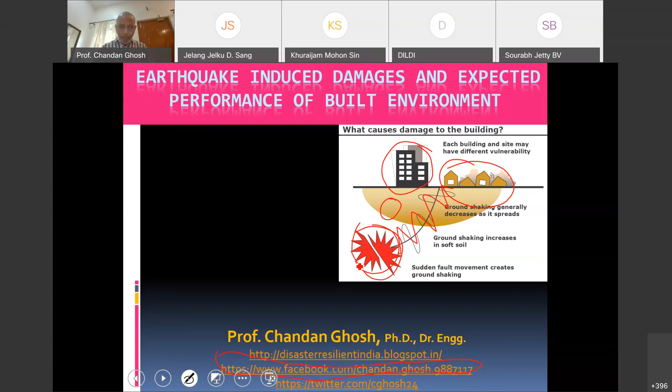The second thing is that whenever an earthquake happens, we record it. Across the globe there are over 70,000 seismometers. In India, counting everything, there are more than 500—IIT Roorkee alone has placed more than 400 seismometers in Uttarakhand, and IMD has more than 120.

Details you will get from Dr. O.P. Mishra. But for a civil engineer, when we have to live in a building—multi-story or single story—what comes into the civil engineering domain, especially the Department of Earthquake Engineering at IIT Roorkee, is significant. They are counted as famous, having a lot of experimental as well as theoretical knowledge.

For the common man: the kind of building you see here, a two-story building—if we recreate an earthquake and apply the same earthquake to a two-story, four-story, six-story, or eight-story building in a laboratory, how do they behave? A number of such experiments are being done in the country, not on a big prototype scale, but in other countries like Japan, Taiwan, and Turkey, they have tested prototype buildings of two, three, and four stories to check how earthquakes affect them.

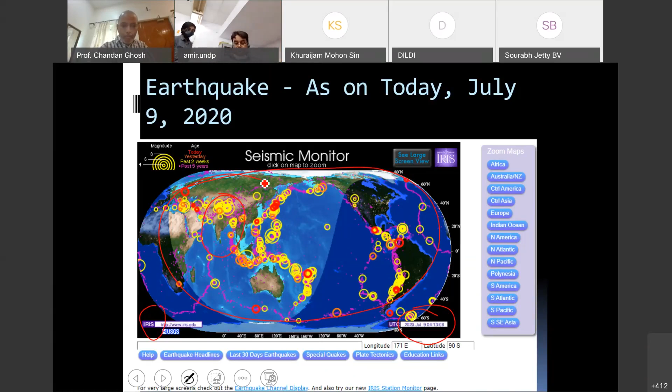And so many earthquakes with times are being recorded by USGS through IRIS, a seismic monitor across the globe, every time, every second for the last so many years, these earthquakes are plotted. Here you can see it glowing as a seismic monitor. So with a click, we can click over here in India, and we can see in and around India how earthquakes are recorded through this seismic network and how they are placed on our global map.

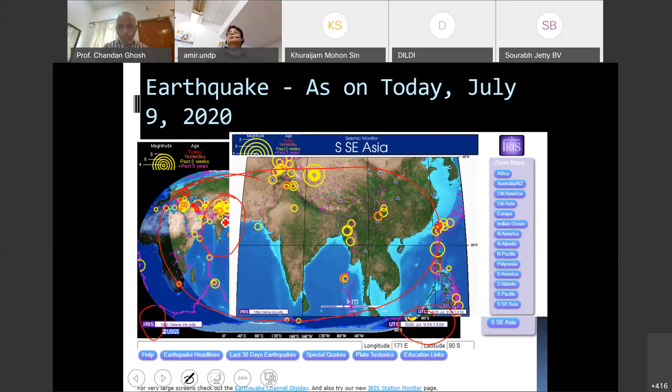This is quick information in the world of information, that these days things are available in our mobile phone. Now artificial intelligence, machine learning, a lot of things are coming up. So our scientists working across the globe made it possible to bring whatever earthquakes are happening across the globe, where I said that 70,000 plus seismic monitors, seismograms, are there. And their data, not all, but some of the important data maintained by USGS, are showing us all these things instantly on the map.

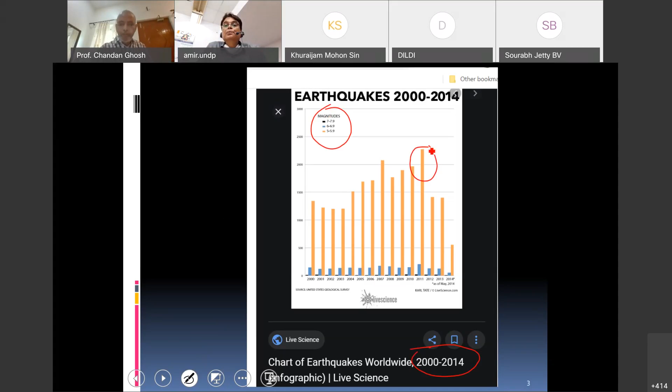Not only that, instrumentation started more than 120 years back, and those earthquakes are also being compiled. I wanted to highlight only this because time is short. In the last 14 years, you can see how many earthquakes are happening. Those more than five may be as high as 500, as high as 2,000 earthquakes in a year, which means on average 4 to 6 earthquakes of more than 5 are happening across the globe, which sometimes may create a lot of havoc and impact on buildings, which I am going to show in the following presentation.

Just giving you an iota of information: 8 and above earthquakes happen once a year. 7 to 8 earthquakes, if you can see here, at least 20 to 25. It means every year, 7 and above earthquakes, like the Nepal earthquake of 7.7, are happening across the globe, about 2 earthquakes in any part of the earth. And about 5 to 6 felt earthquakes, which may be damaging to some extent, are happening in our country. We have no way to control them. This is what I wanted to highlight.

So an earthquake happens, we cannot stop it, we have to bear with it, and it is our own responsibility to protect ourselves. So we have to take our own responsibility, including government, you, we, everyone, all experts sitting there, because earthquakes shake buildings and cause damages. If you are not careful enough in designing and constructing the building, which I am going to show you some of those lacunae, then it breaks, torn apart; roads, dam breaks also may happen. It causes landslides, tsunami, and a lot of things.

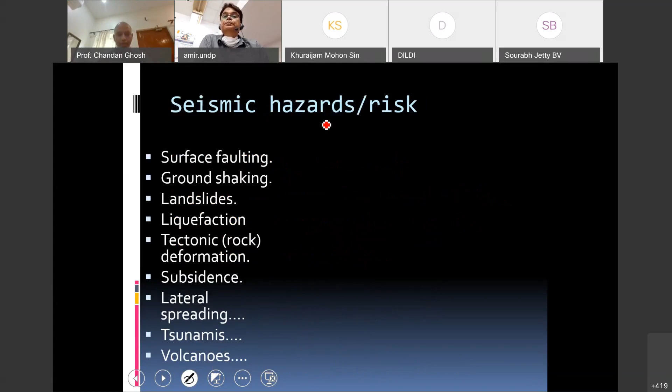But we cannot make buildings really, in engineering language, earthquake proof. We can make them earthquake resistant. That is our limitation. So let us see all these things that happen in an earthquake. Landslides, dam failure like Subansiri Dam may occur, but these rates are very small.

And while designing a dam, our experts take care of a lot of things in the design of the dam and reservoir and maintenance. But if an earthquake happens which may fail the design or concept that we have accrued so far, then we cannot help. But we take most of the available knowledge into consideration while making, constructing and maintaining a dam.

Building collapse, of course, I'll do in detail. I'm not going to show this part: train wreck, utility malfunction, tsunami. I'm not going to cover those here. Landslides also happen, which is complex. I'm not going to cover it. I only concentrate on this portion. There may be fire also.

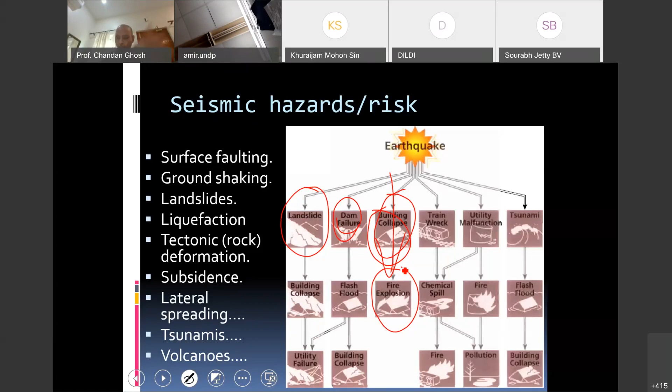So there are a lot of tests and experiments being conducted across the globe by various research laboratories to simulate building collapse by a recorded earthquake and then fire or utility malfunction. All these things have been tested, because being engineers, from a scientific background, whatever is happening we cannot create or control, but we can at least reproduce some kind of its impact in our robust laboratory, where I said 7-story, 8-story buildings are tested to check their performance, because my topic is performance. So the context is building performance in earthquakes, and where we are lacking, we will see.

Construction monitoring and peer review check: we are not even conscious about the new buildings even today. I'll show you many things, barring a few of them which are being monitored and constructed well. Damage pattern and mitigation: mentioning codes, National Building Code 2005 or 2016, NDMA or NIDM guidelines, in the sanctioning of the plan is not enough.

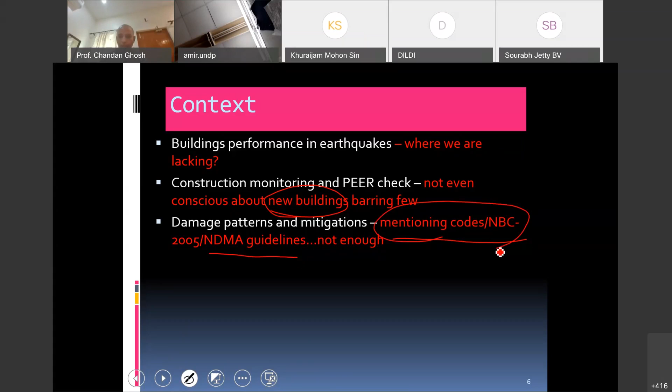Implementation, enforcement, community guidance, community awareness, which we have to work together on. That is more important than simply mentioning that Fe 550 or 600 rods are being applied or such and such cement is being applied. I'll show you those examples also.

Economic feasibility of mitigation measures, which is being hyped right now because of the several earthquakes happening in the last 3 months in and around Delhi NCR. So I should not say it is hyped, it is happening. Our instruments are recording, people are coming to know it is happening more frequently. But no systematic study has yet been taken up by our scientists. Simply we are being asked whether it is the precursor to a bigger one or not.

We are saying something not based on the systematic studies which must be in place, which have not yet started in our country, to check the activity of those faults in and around Delhi or elsewhere in the country. Some experts are taking it up; Dr. Devesh Walia is one such expert, taking care of the dormancy or activity of the faults in the northeast part.

So, health monitoring of buildings: here I will concentrate a little, and also show some glimpses of a building survey that we did in a quick manner. And post-earthquake health checkup: no steps have yet been taken so far. After an earthquake occurs, we have to check whether some progressive failures are there or not. Systematic study has not yet started in our country.

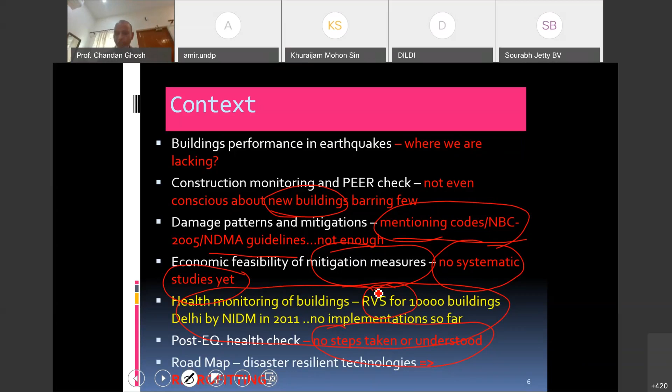Now, with the recent earthquake in Delhi, we are concentrating more on rapid visual screening to check whether my building is safe or not. We are in a very, very preliminary state. And of course, what will the roadmap of disaster resilient technologies be? Many guidelines, many meetings are being held, but I cannot discuss all these things.

So as Dr. Walia has mentioned about me and Facebook, I have taken some screenshots this morning, like CG means Chandan Ghosh, FB means Facebook, and the 1490th posting, where it is showing with a little bit of comment the hill towns of the country. Surely no expertise which we are discussing through this seminar is enough to apply or think of some retrofitting or any such measures.

It is not possible just by seeing these things; okay, people have been living there for 100 years, but individually looking at one building here, it may affect others in case of an earthquake and earthquake-induced landslide in such a steep hill. So looking at such constructions going on without guidance, without knowledge, without understanding, we also say that we do not know many of the things.

So we as engineers know nothing so far about protecting such built-up facilities, and it is completely impossible to save lives if an earthquake of 6 plus comes within 20, 30 or 50 kilometers, because this is seismic zone 5. So just remembering or telling that we are in seismic zone 5 is not enough. Here we have to work together to take care of each of the buildings.

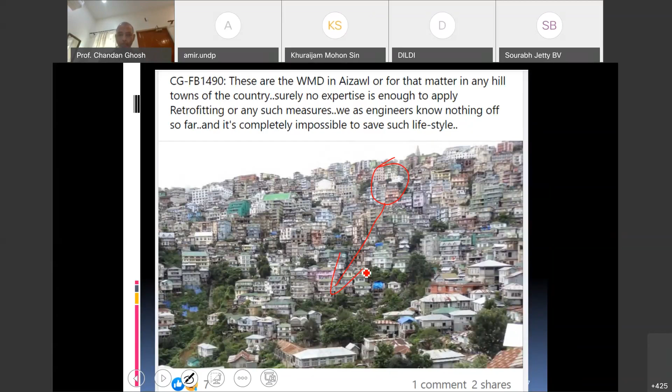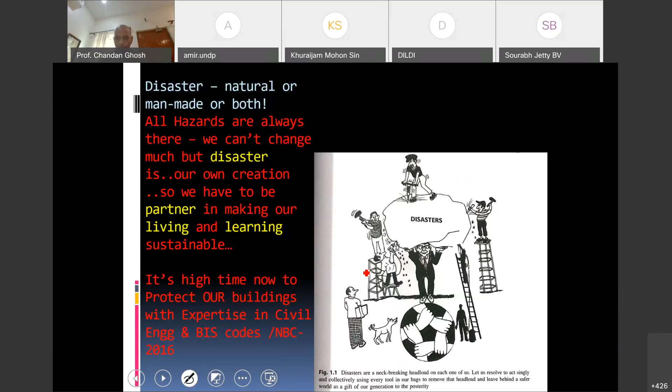So disaster, natural or man-made or both, there are a lot of definitions, but we have to be partners in making our living and learning sustainable. It is high time to protect our buildings with expertise in civil engineering and the relevant BIS code or NBC 2016, which has been revised; doing things simply our own way, from our own angle, is not going to help.

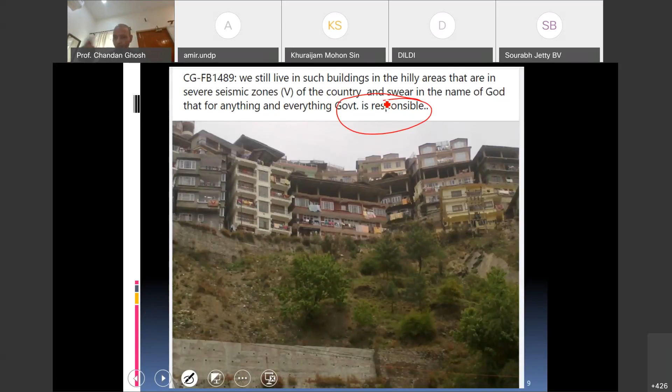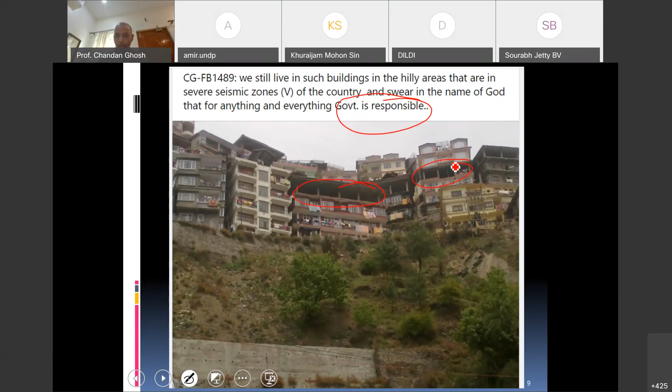This is also from Facebook: we still live like this in hilly areas in severe seismic zone 5 of the country, and swear in the name of God that the government is responsible for anything and everything. Probably we have to see who is responsible. Before that we have to make our own building good enough, not allowing such openings, because any little shaking of intensity 5 or 6 will collapse the building. And since this is a hilly area, especially in Shimla, they will fall on other buildings also.

While trying to address these issues, buildings on stilts, here it is on stilts, were tested on a shake table. I'm not able to show it here, last time also I tried, but there is a complete video where a 6-story frame building is being shaken at the ground using the same kind of earthquake that we have experienced, and within 5 to 6 seconds, the bottom part here, I have taken from the video of that experiment, just one screenshot to show you that the 6-story frame tested on a shake table fails at the bottom.

So this is what is going to happen. I'll show you some of the techniques for how we can stop our existing buildings, 5-story, 10-story, 20-story, like in the NCR area, on slender columns and stilts, which can be checked, or maybe some measures can be taken to stop such buildings failing in this manner, which was proved by an experiment that they will fail again. Because experiments, if you repeat them, it will happen regardless.

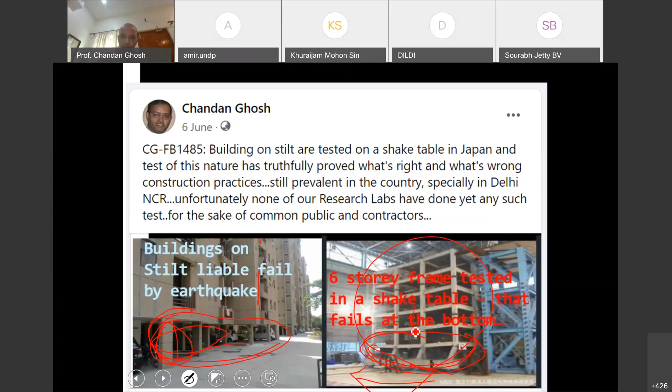So this lacuna inbuilt in such buildings has been retested, revalidated by doing a similar kind of study without any infill wall here, no infill wall, and even then it is broken, which means it is much more dangerous. But you see that this one, there is no column. Here there is no column. You can see at this point there is no column.

So such kind of geometrically dissimilar buildings are constructed in our city areas, even though so much reinforcement is being provided as per design, I don't know what kind of design permits this. These are the designs made by so-called engineers. I would say so-called engineers, maybe there is much other interlinking there, which I don't want to explore over here. I have mentioned here all these things.

Keeping all faith in the building code, we continue to make such constructions with genetic flaws by providing this irregular column placement of load-bearing columns and beams. And we still think our municipalities, as I mentioned here, shall come on the receiving end with PILs flooding the High Court and demanding justice for the earthquake safety of all buildings in Delhi or NCR or Northeast or NEHU or wherever it is.

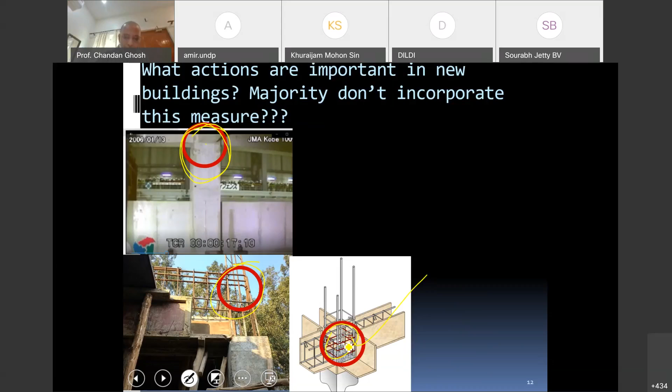So this is a recent thing which I wanted to highlight. And we still make such kind of things which is wrong, genetically wrong construction. And it is there in the code, to provide stirrups inside, but still we don't provide them. But this is provided over here, where the beam is centrally located. Then with such kind of stirrup, if it is provided, think of that, is there any extra cost required while ensuring that these things should be like this, not like this?

This is where the municipality or government is not going to come. This is where the community who are attending here, not as earthquake scientists or seismologists or civil engineers, have to look to ensure that the mistri or mason or contractor ensure that these things are in place. Otherwise, if we make these things, this is not going to be earthquake resistant. We must remember that we are living in seismic zone 4.

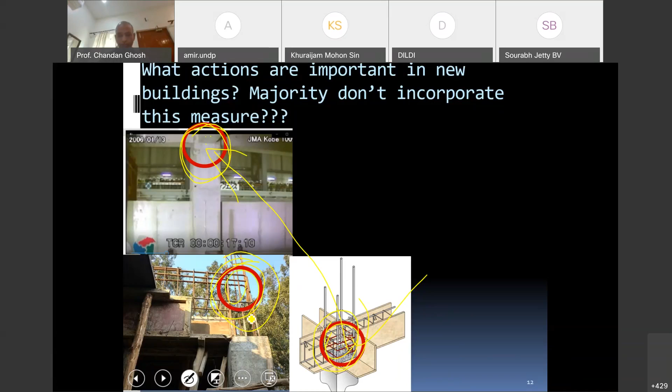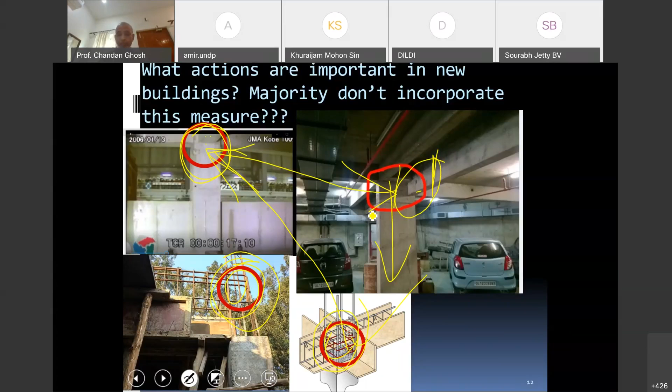Like you see, this is one of the, I would say, green rated buildings, where you see the position of the column, hefty column, but see the slender beam where it is not at the center. You see the mockery of design, the mockery of construction that we are doing in actual implementation. These are in the posh area. These are green rated buildings, maybe 5 star rated, but we are neglecting this cause where civil engineers are very much concerned. I'm showing you that these are all defective buildings. Whatever hefty column you are providing, if this column-beam junction is not enough, these buildings are defective.

But constructing, reconstructing, repairing them in minimum possible time, where, in case a landslide happens, our Border Roads Organization keeps a lot of contingency arrangements to bring the road back in a few hours or a few days. So getting this capability, wherever such kind of chances are there, is also contained in our fighting or living friendly with earthquakes or landslides.

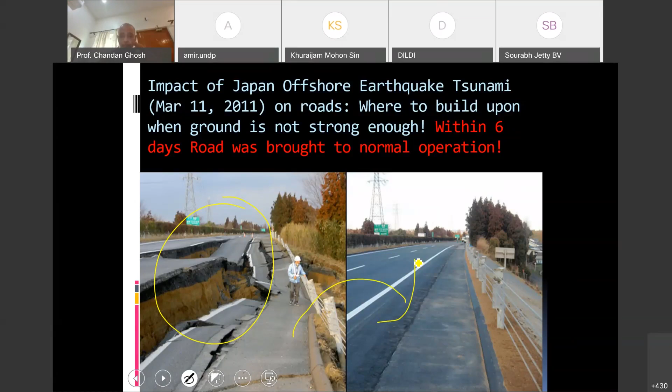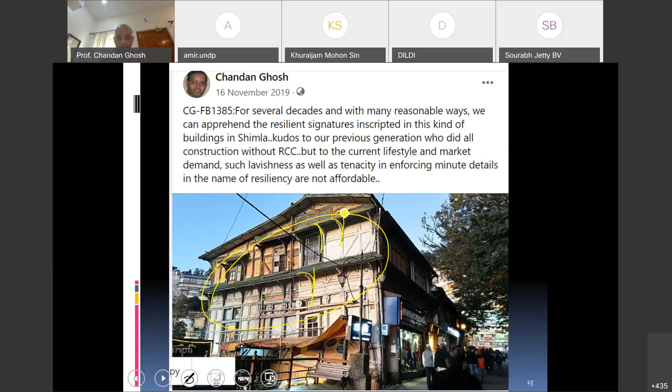Of course, they are not living here, but we have not taken any lesson from this, the kind of bracket that they are providing here. We have incorporated all into the RCC, with the kind of blemishes that we are doing. So the community has to come forward. This kind of building in Uri has failed, but these are still existing.

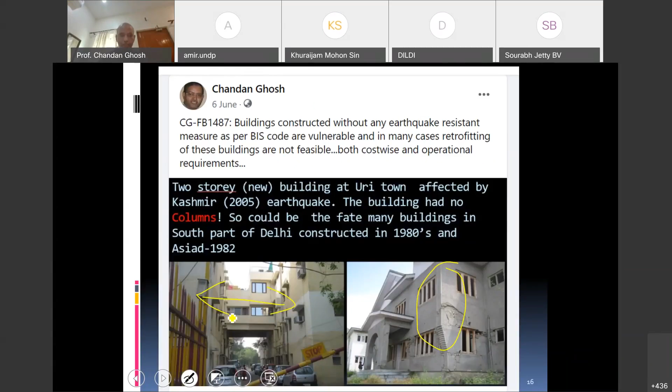So these are the things. I have given you the slides. You can see I still have things to go. Here a column is not provided. That is why it's broken. New building in the 2005 earthquake in Kashmir. In 2005, 70,000 plus people have been killed. But these are again the signature of Dhajji Dewari type of buildings in Kashmir and that side.

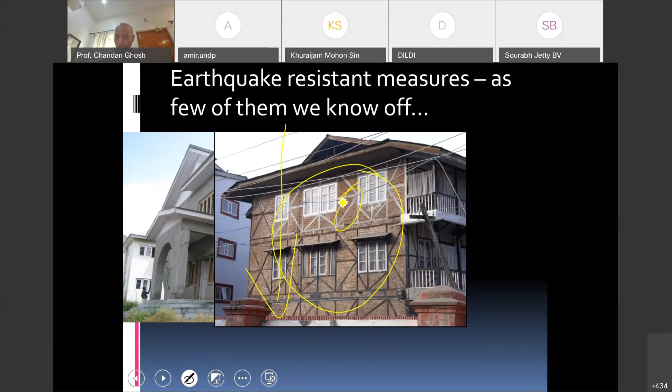And these days we do not make these things because proper methodology is not there. Karigar or mistri or expertise is not there. And instead of using wooden things, we have got many aluminum as well as metal frame members which can be used, but the art has been lost, except a few documents are available. So this is again in the Northeast, in Guwahati, where these are still existing.

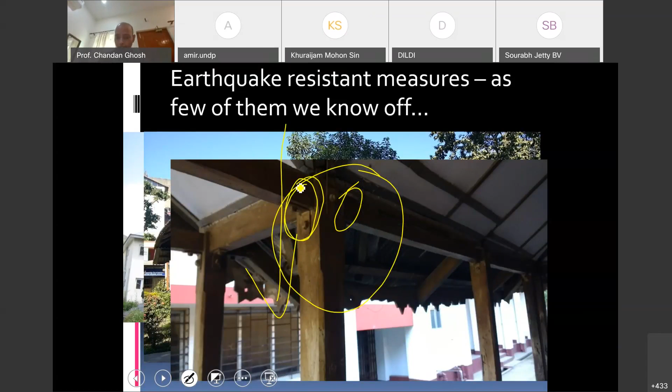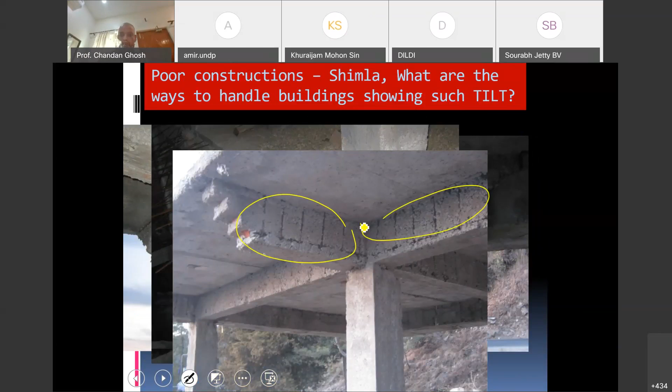I'm only showing that with this kind of brackets, more than 100 years before, they have ensured the integrity of the building. This kind of connections are very important. Otherwise, the kind of construction that we are doing here, covering it all with cement and plaster, is not going to help us.

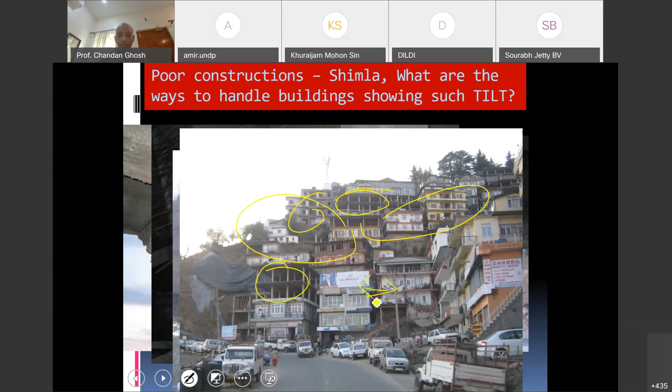This is in Shimla, again of similar nature in Aizawl, and in many places in the hilly areas, even in Sikkim also. These are all things we can see by naked eye. There is no gap between the buildings. So all these things are the signature of the vulnerabilities which we are living with. So simply sitting in isolation, attending a lecture or reading different documents will not help until and unless we as individuals go to this.

This is in Shimla again. For the last 10 years, this building is twisted without even an earthquake, and it is unattended in this manner because it takes a lot of money, effort, and expertise to check and to correct it. We don't have that kind of expertise in the country.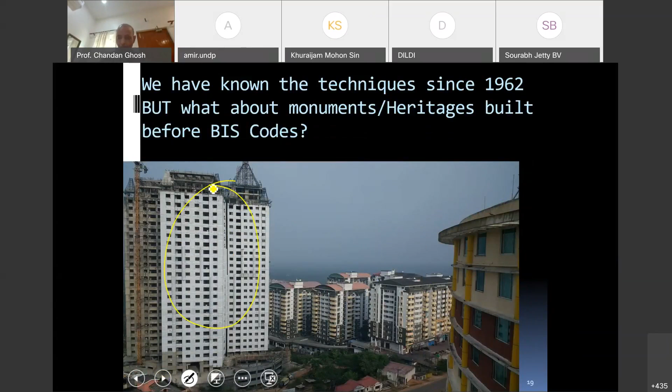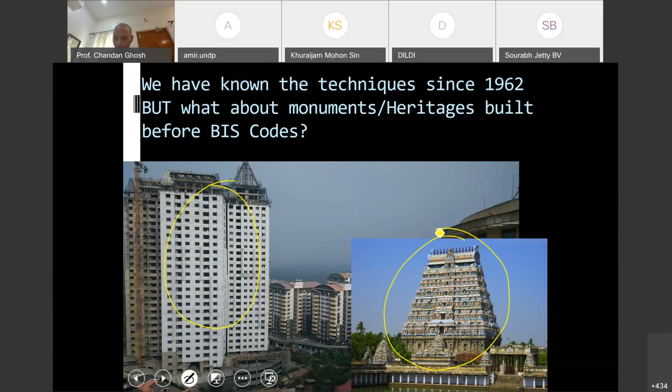And we have expertise to make this kind of buildings, even 100-story buildings, several hundreds being constructed in Bombay or many areas. But we do not know how those people built 500 years before, 1000 years before, and these are still standing. We have known the techniques since 1962, the Indian Standard Code, but what about the monuments or heritage built before the BIS code was created? A lot of studies are being made in various IITs and universities, but still we construct buildings in this manner.

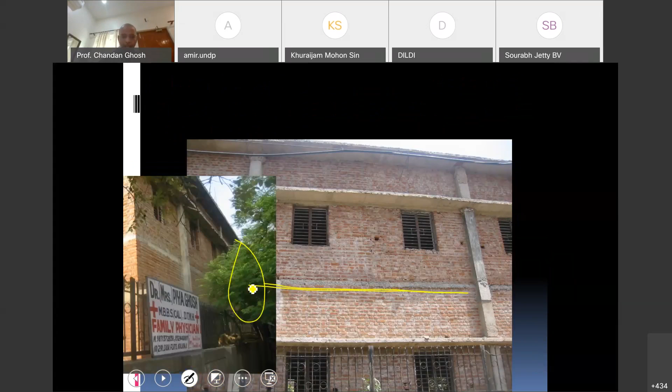We don't provide the beam here, or we don't provide anything here. When we cover it, then we show something like this kind of column, because this color and this color are the same. So while checking these buildings right now in the name of rapid visual screening, we will be totally misled by such kind of signature.

Such kind of signature we can see from the front, and there is no way until and unless you cooperate as a community to help show that these kinds of defects were there. Then, in that case, appropriate measures can be taken by the experts.

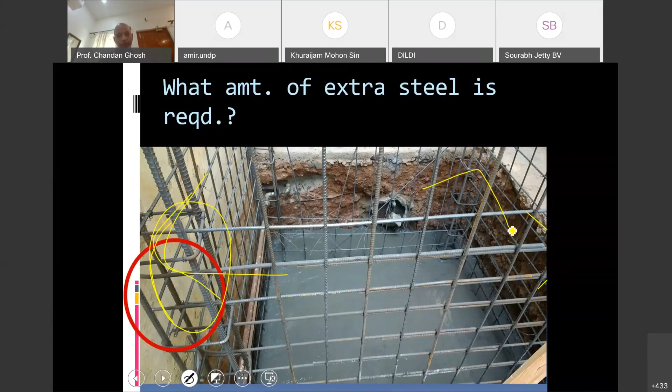But still, this is a lift shaft being constructed. There is no connection here, no connection this side, no connection this side. So the lift shaft, which is supposed to be a rigid, good one, we construct in this manner. I'm going a little quickly, and this is the RVS, Rapid Visual Screening, for 10,000 buildings we did in 2011 with the help of MCD and the Delhi government after a building failed, and NIDM did this investigation.

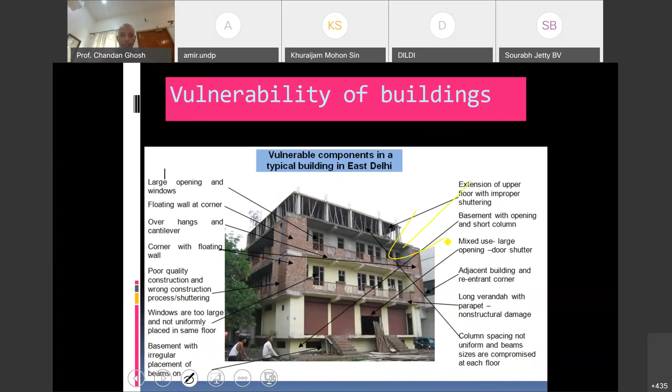So, the front page of that investigation report submitted to the Delhi government, to the investigation commission, shows all these arrows indicating that these are the visually observed defective items. Each and every item seen in such a building. All these arrows indicate, from the experience point of view, that these are all defective items being highlighted. So it is all disease. Some are genetic, some are symptomatic diseases in our building, which we have to check.

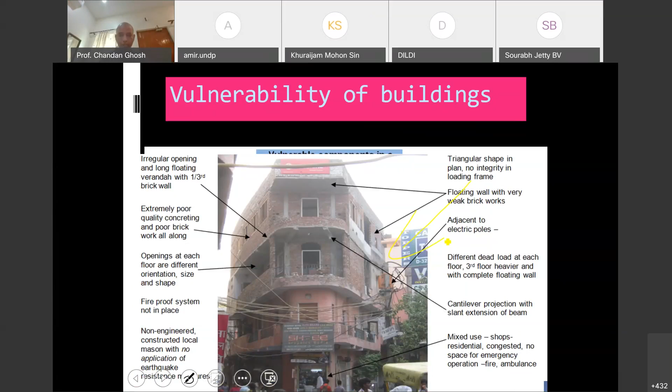And we make buildings in this manner. I can show you. First, we make our house. Thereafter, it shapes us. Winston Churchill said that, and it is true, but this I have written: first, we make our house satisfying our desire. Thereafter, we ensure the Almighty for disaster safety. We have to change this thing. This is why this interaction is going on.

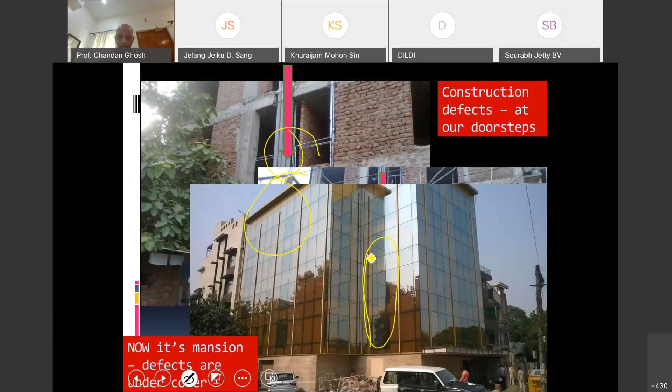Think of the beam. It doesn't need a civil engineer. A common man can understand. See how these utilities are going here through the load-bearing beam and how it is being covered over here. And finally, how the total building has been completed. Now you may be laughing, or such kind of construction has become a laughing stock, but we have to take the spit on ourselves for what kind of negligence, what kind of social responsibility we as engineers, or you as community, or the person who is constructing this, keeping all rules and regulations on the shelf, are showing by allowing such kind of things in our locality.

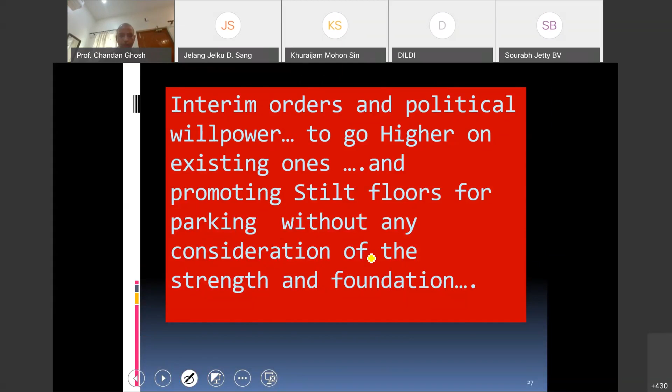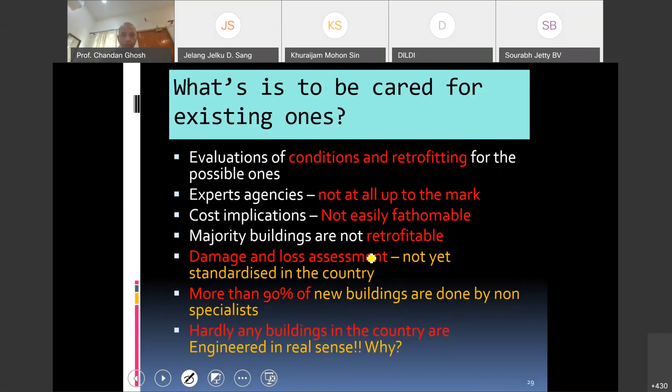So, interim orders and political willpower to go higher in existing ones, and promoting stilt floors for parking without any consideration of the strength and foundation we are carrying on. So what steps are enough for a building? These are written there. You can see from the things I have given, because I want to show a little more. Evaluation of conditions and retrofitting for the possible ones is a challenge which the country has started, but I know it will be a lost game for us unless we take care of the buildings which are under construction right now with the available knowledge and know-how. Then only we can be sure enough.

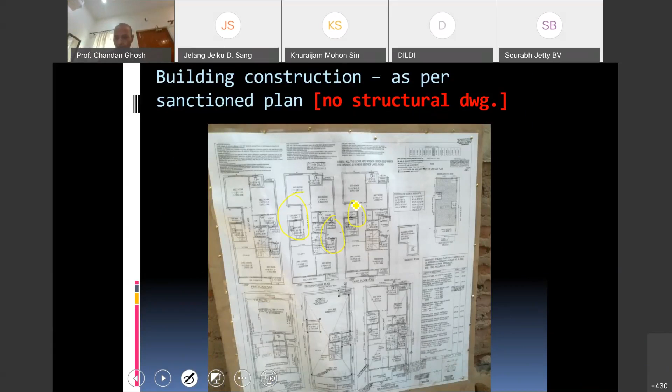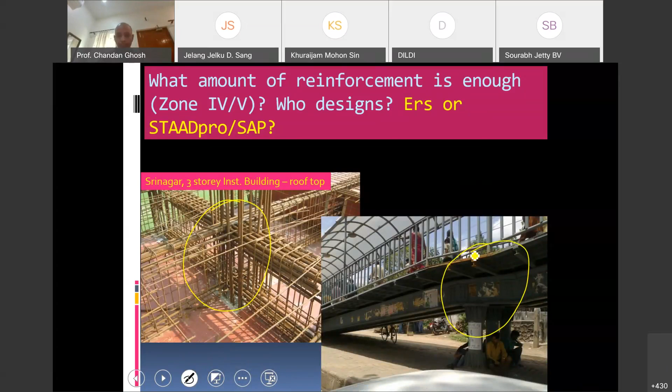The municipality requires that during construction you display all these items. But think of this plan. Those who are civil engineers or planners can see that such kind of discontinuity in the plan is not allowed. But these are not practiced here under sanctioned plans in Delhi and NCR. We construct such buildings in seismic zone 5, even 3-story buildings. We even construct foot over bridges like this in our area. So these are all wrong practices.

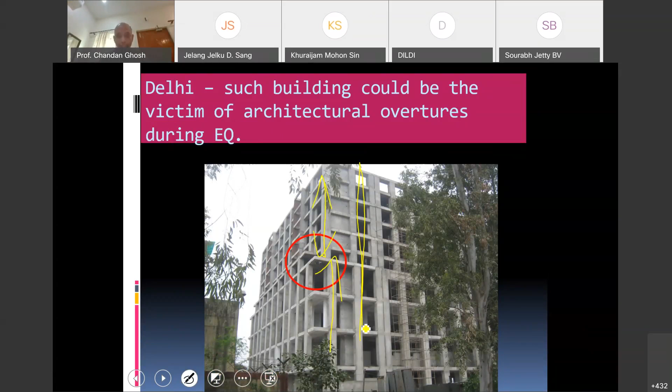And we make a column over here but not over here. You see, this column should continue over here according to code. But making columns at a different level from mid-story creates serious defects, which we will realize only when we do some kind of testing on this. And we make this one 4 times this one, which is not allowed. More than twice is not allowed. See the bending over here.

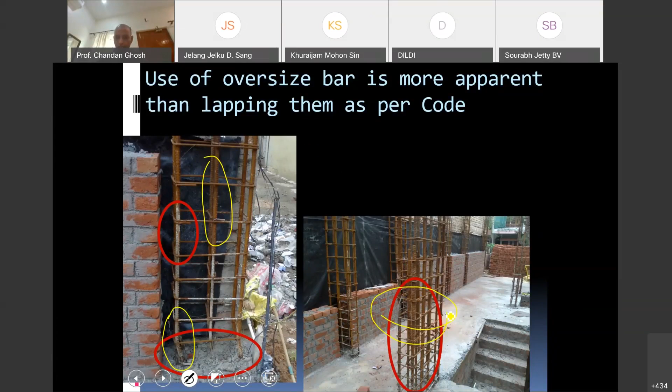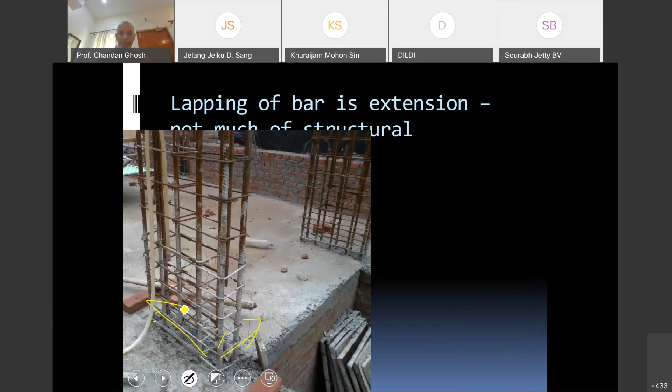These are not allowed. See what kind of defects are there, what kind of steel is there, how these things are rusted, and where the band is provided, where it should be at the middle third, not near the bottom or near the top. We know all this when we inspect the building; see this width and this width. These are all defective, but we cannot help it, despite all the rules, regulations, guidelines and instructions given in the code. And we make this kind of thing in many places.

Of course, it is not feasible. We say M25 and above has to be made mandatory as per code, but the majority, 80 to 85% of buildings, use such handmade concrete, so we cannot do that.

Okay, so we cannot ensure.

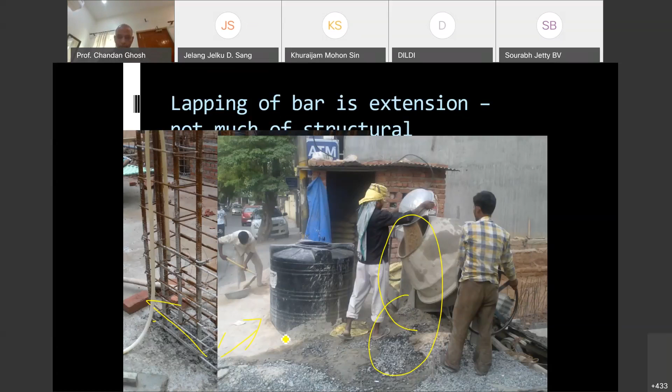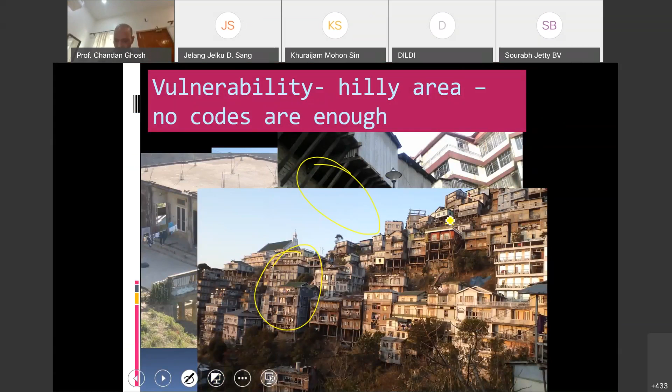So how do we start our rapid visual screening? These are systematic processes that have been in place since 1988 onwards.

Actually, this process we have carried out up to a certain part. Beyond that part, we have not done anything. Now the country is looking at this part. Up to this part, some cities like Shimla or the Himachal Pradesh government, many state governments have done. But going further requires a lot of expertise, companies, machineries, as well as knowledge and know-how, which is still required a lot.

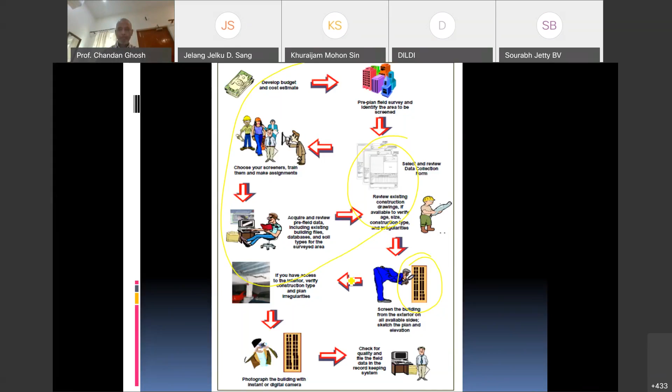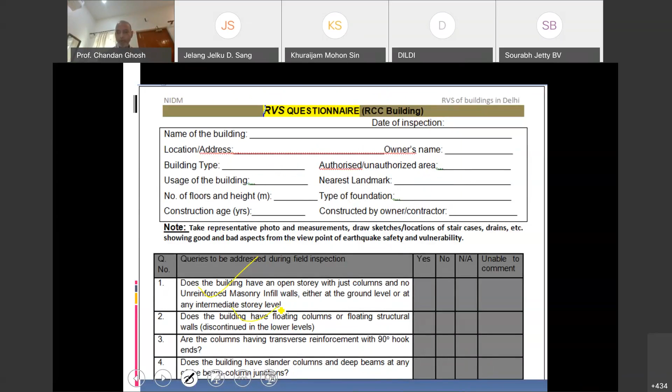So we have made a simple format here, addressing 25 questions, including building address, then asking questions and filling up yes, no, not available, or something like that. I have taken a few examples of these questions. Quickly, I'm going to show that.

Is the plan aspect ratio more than 2.5, or is the building resting on liquefiable soil or reclaimed land with no compaction? These are small questions just to have a brief check on the buildings we are going to check, which are already constructed.

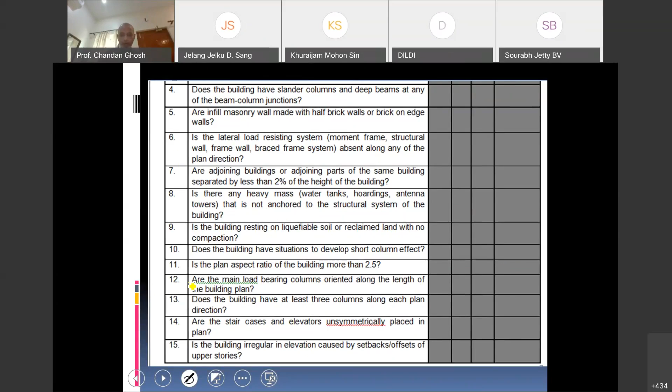Is the building irregular in elevation, caused by setbacks and offsets, which are often present? We have to note it.

Are the beam column support junctions centrally positioned in all floors, as I showed you in the beginning? In 99% of buildings, this aspect is not ensured, even though analysis takes care of some offset, but construction doesn't ensure the authenticity of resilience or real performance, because the topic here is performance.

It doesn't ensure it. So let us see this building I showed earlier. Seismic actions - if the column is not properly designed in a seismic zone 3, 4, 5, corners fail. Even the middle portion of a building, several such failures have occurred.

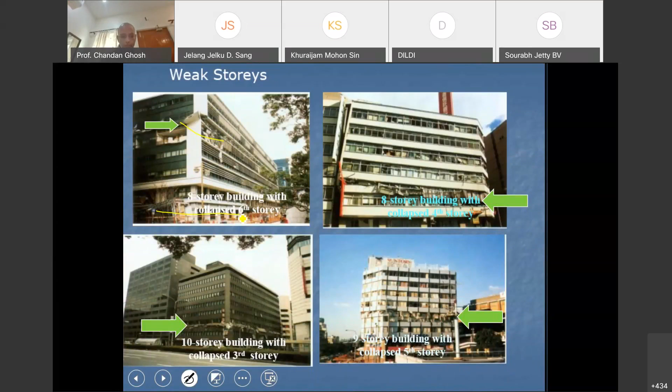Even in the Bhuj earthquake this has happened, because of the stiffness difference between bottom and top floor. Even if it is at the ground, yes, we have highlighted it; even if it is at the middle of the building, they get affected like this, you see. So, if we neglect this, we have to lose our cars, and sometimes they are more costly than our costly flats.

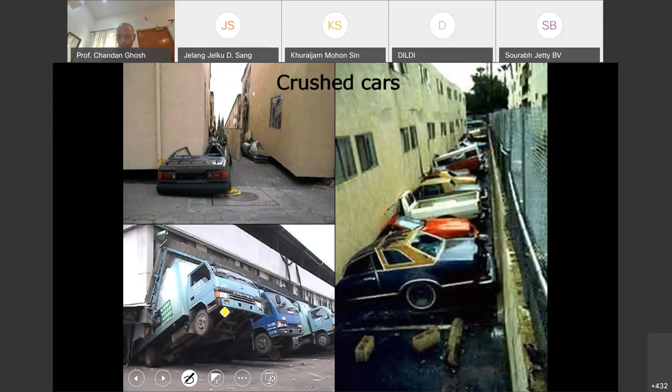And we have to check: are the columns having transverse reinforcement with 90 degree hooks, yes, 90 degree. In the majority of cases, we have to forcefully ensure that, but people don't take it seriously. All this 90 degree here, 90 degree over here. This is so simple, but we don't ensure it in the majority of cases.

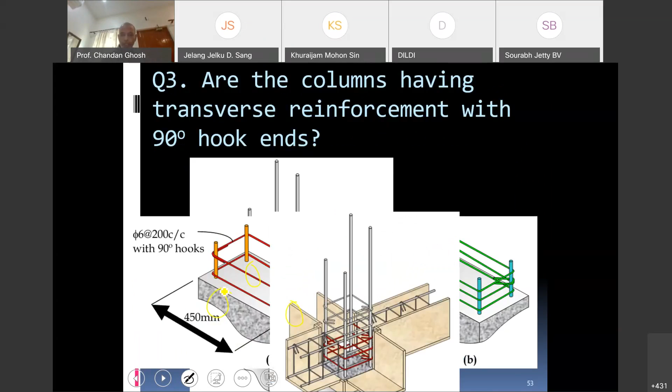So these are things we have to ensure, like this kind of wall. Especially for civil engineering 4th year students, it was common in our times to design an elevated water tank with such frail members and such a heavy mass at the top. We did project work on this, but these are the most vulnerable structures for a distant earthquake in a city.

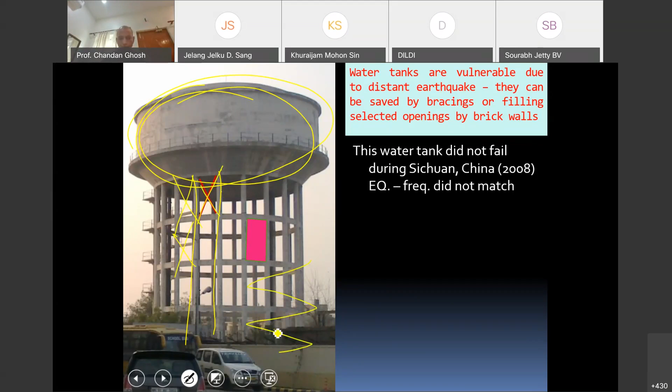Of course, because the time period of these structures is high, sometimes 3 seconds, 4 seconds, an earthquake has to come from more than 100 kilometers distance to match it. But what to do with this? The immediate thing is to make at least some kind of bracing to make its stiffness or its response stronger, so that the difference between this member and that one in transferring vibration, by taking it as a unit, is reduced - then we have to go for stiffening of these members. Otherwise we cannot.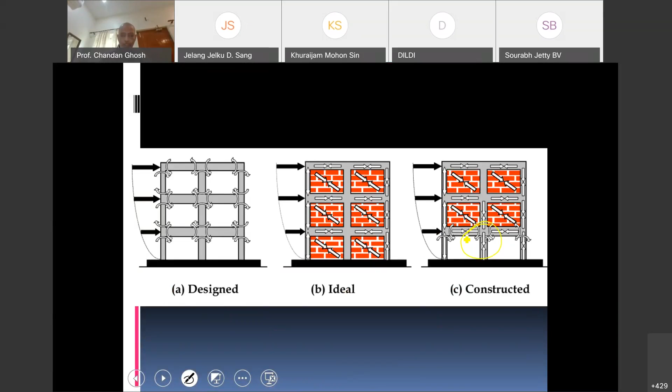So these are the things - you see why it is broken over here. There are many things involved. But a simple thing we can do in a soft-story building, in the red part here, is at least make a brick wall here, here, here, here. That will give some stiffness to the soft-story, whether it is a ground floor, middle floor, or underground floors.

Then without disturbing the parking, engineers, planners and community all can work together to facilitate parking while strengthening the building with a community spirit, to strengthen such kind of stilt buildings which are there in plenty, from the earthquake effect.

So these are all different questions. Now, if there is no space for shaking, these buildings are going to collapse.

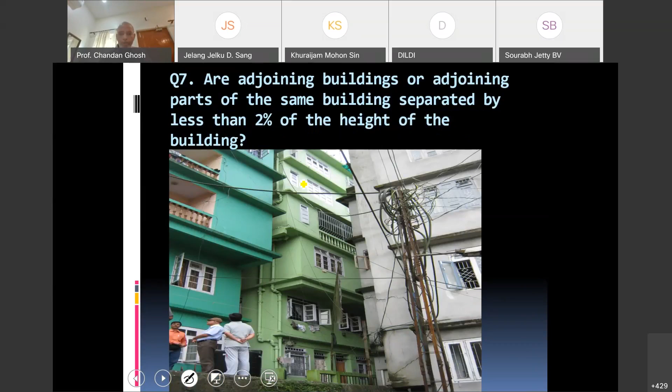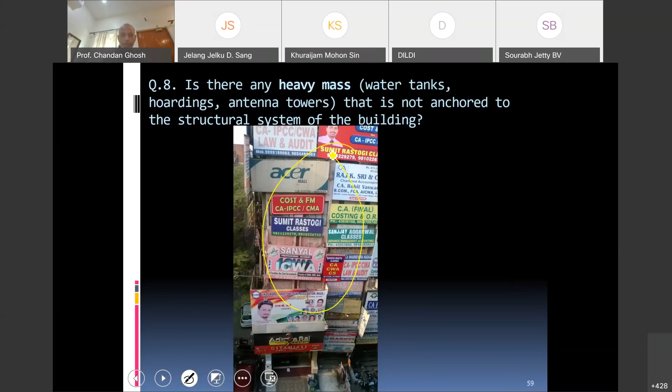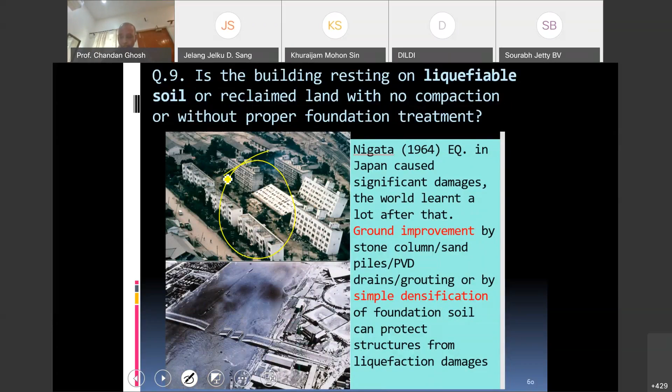And liquefaction, of course, these are very famous from 1964 Niigata, but in our 1934 Bihar-Nepal earthquake also it has happened. Even in 1897 a lot of signatures were there, but at that time our engineering or scientist community were not equipped enough to study those signatures given by the earthquake even 100 years back. But the 1964 earthquake gave this definition, and we have done a lot of things since.

Did the building suffer any significant damage? Here, I'll show you this building I have shown already, but this is one building near Sikkim. This bridge collapsed in December, exactly 3 months after the Sikkim earthquake of 18 September 2011, because we didn't check the post-earthquake effect on the bridges which were being used by some.

In the Rangchang Khola area, Singtam and Dikchu, a 48-wheeler heavy trailer carrying transformer for the Teesta Urja project collapsed it all. So you see, because we didn't have any expertise or idea about the post-earthquake health checkup of buildings or facilities and other things.

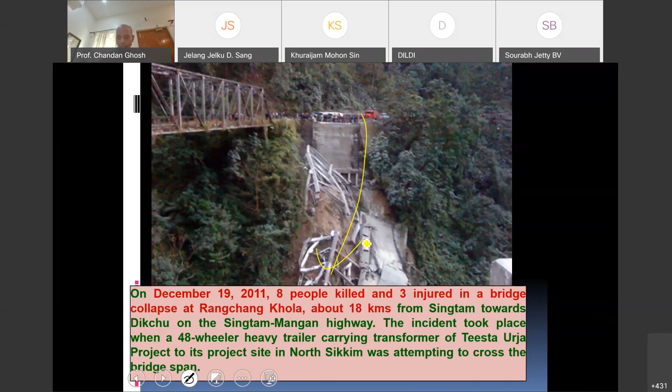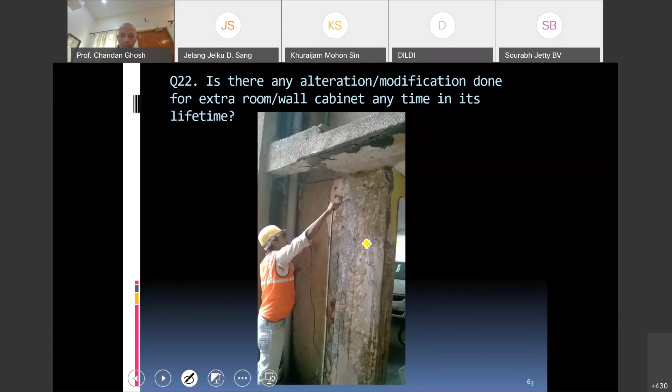Even we can strengthen the building by injecting some fluid inside, that is also possible. We have got all the means in the country. Only thing is that we have to diagnose the disease and then apply the proper medicine to the building to look after it. But these days, many people are playing this kind of game just as an eye wash. Be careful. For that, we must be thorough about the building diagnostics, where the defect is, thoroughly.

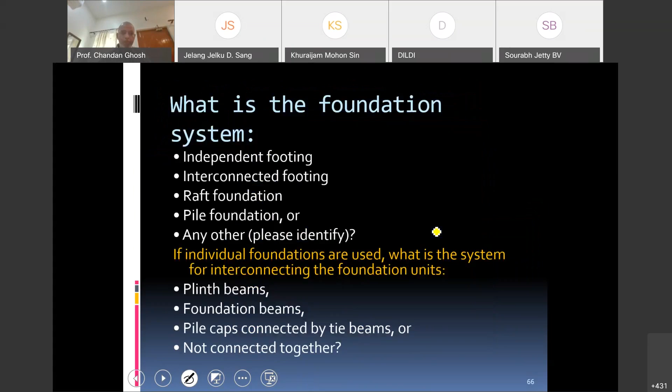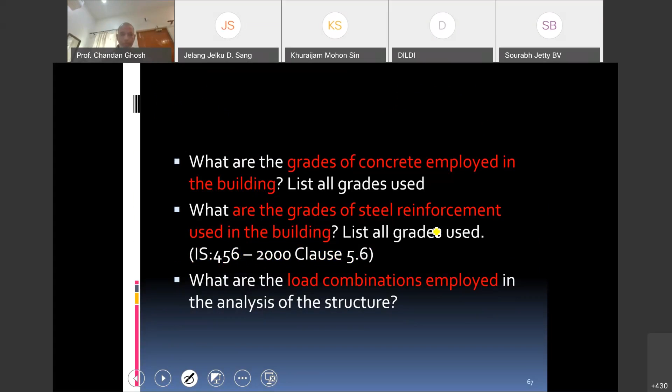So to end this, I would like to say that the grade of concrete, grades of steel, and what load combinations are employed in the analysis of structure - when you come to know these things, it becomes your job as a community participant to be aware enough that there are simple things in building construction.

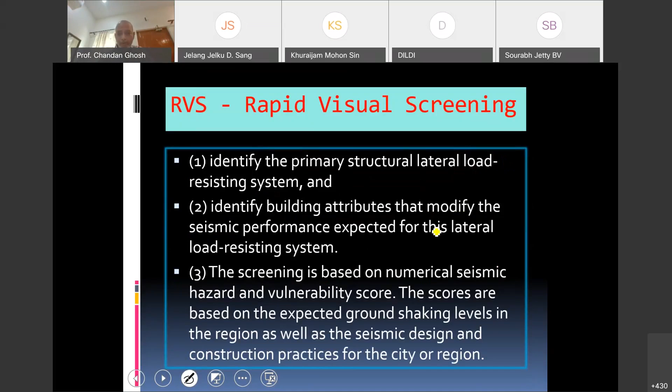If you take it with a community spirit to make your own building right now onward, we can save at least 70 to 80% of the collapses or damages on the building from the earthquake. We are experiencing 80 or 90% of earthquake damage that we can save from these petty measures, both you and we together, those of us playing an expert role.

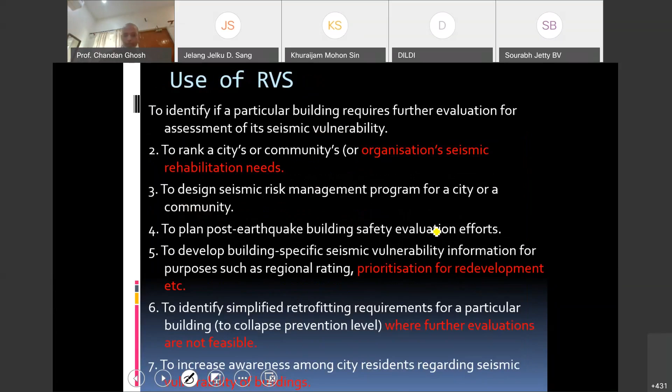So use of RVS and other things will help in having a primary diagnostics of our building, to check if something may go wrong, then we can take care of it. So RVS is to be taken extensively across the country, and detailed vulnerability mapping is to be taken up with utmost priority.

Some building typology manuals were created, covering 33 building types. Professor Yogendra Singh was also part of that, published by NDMA. But after that, we need to do a lot of work in categorizing all buildings across the country to bring them under that typology, so that we can check their retrofitting requirement, evaluation, or the RVS requirement for that.

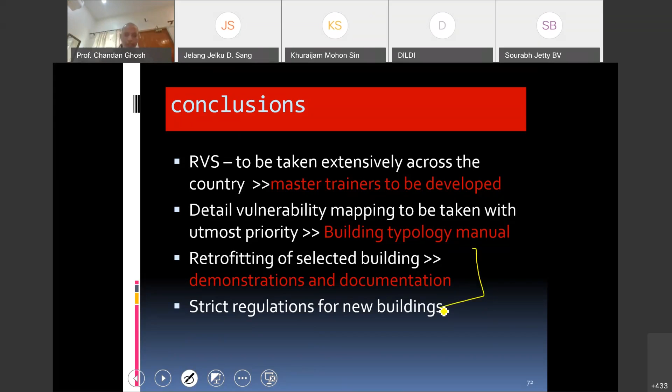Retrofitting of selected buildings needs documentation. This is going on, but it will take a long time. Some money is there, but only thing is that we have to sensitize ourselves on the spot. Strict regulation for new buildings have to be enforced. Thank you.

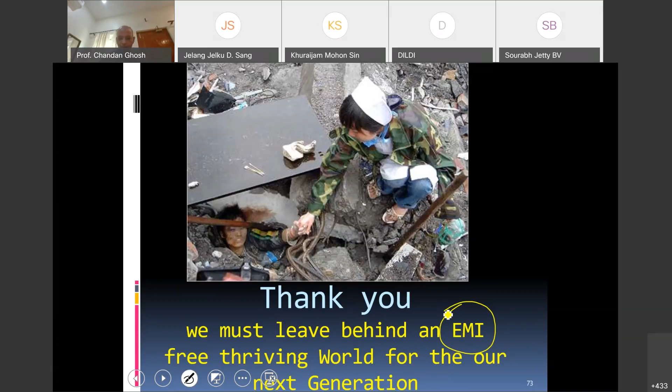So the message is, along with you and me, along with social media, along with such kind of interaction, we must leave behind EMI. I am heavily attached to this word because of the building that I have here in Delhi. An EMI-free world for our next generation. Thank you.